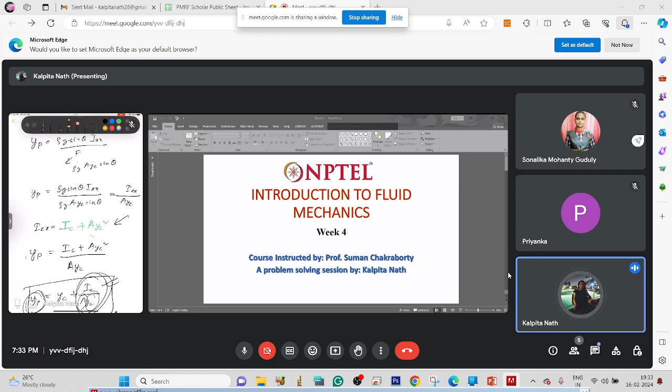Now if we will do the same thing for a curved surface, we won't go for the full derivation, but I'll give you a brief explanation or idea about what is happening. So if this is a curved surface, for any curved surface immersed in a fluid, what we will do is take the projection of that curved surface, that means volumetric projection.

If this is a curved surface, this is not just a simple line, right? This is like this. So it will be the whole volume of that surface, the whole surface into the board or paper or whatever the notepad may be. So this will be like that.

So what we will do is take the whole volume, that means this whole volume that is above that curved surface. We will take the pressure of that whole volume acting on it to determine the pressure that is acted on this curved surface. So let's suppose this is the vertical force, and this is the horizontal force.

This is the force. First we will calculate, or derive rather, the force that is acted by the surface on the fluid. So what will be the force that will be acted by the fluid on the surface? That will just be the opposite of this, equal and opposite.

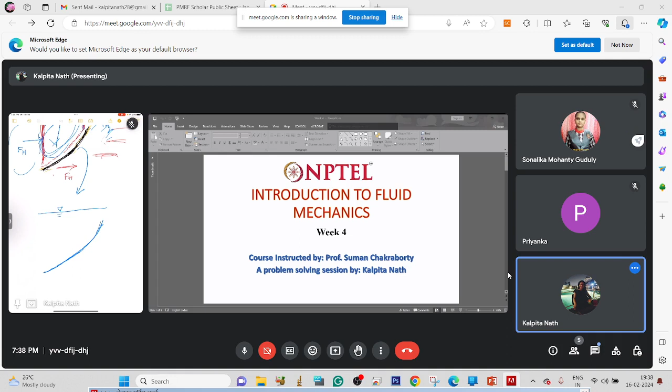Now we are interested in the forces acting on this projected volume. So let's zoom this up. This is the free surface. This is the body. This is the volume that we are taking into consideration.

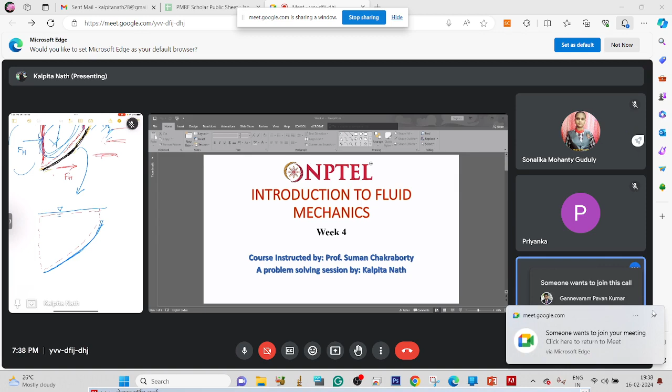Just one second. This is the volume that we are taking into consideration. And this is the weight. This is the vertical force and this is the horizontal force.

So this is because of what? This is because of the components, because of the reaction between the surface and fluid. So these are the final components, right?

So this is FH1, as I already told. For this fluid on the left side of this surface, there will be pressure exerted on this side of the projected volume. So this is FH1, and this is FH2 on the right side, acting on the right side.

AB and CD are plane surfaces. Let's suppose this is CD and this is AB. So AB and CD are plane surfaces. And now, if we find out...

If the fluid is in equilibrium, then the summation of all forces in the x direction will be 0. So in the x direction, what are the forces? First is FH, one force due to the reaction.

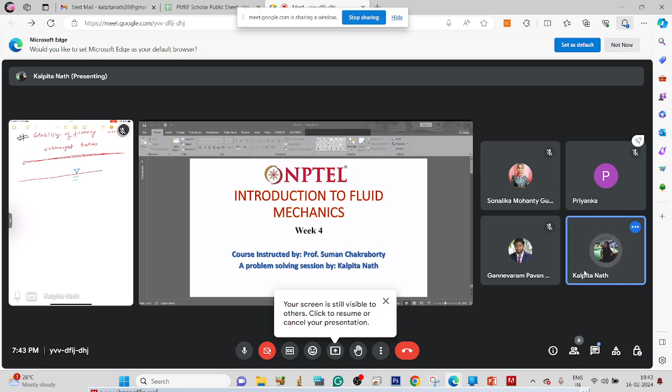So there will be, let's suppose if we take a body into consideration, let's suppose this is the free surface. So this is a body that is completely submerged in this fluid.

This is the center of the body. If this is the center, then let's suppose this is the center of buoyancy, and this is the center of gravity. So center of gravity will denote the weight of the body, and this will give rise to the buoyant force.

Okay, so let's suppose this is OB and this is OG. So there are two cases, one is stable, another is unstable. Can you tell me, in the stable case, whether B is above G or G is above B? Anyone?

B above G, ma'am, in stable case. Yeah, correct. B will be above G for stable equilibrium, and for unstable, vice versa.

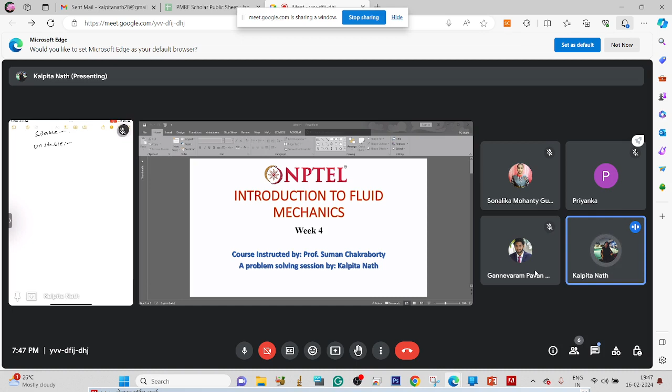So suppose if this body we are just tilting it on the right. Let's suppose now, this is the free surface and this is the body. This is the center of buoyancy and this is the center of gravity.

So for center of buoyancy, the force will be in the upward direction, and for gravity it will be in the downward direction. So what does a couple mean? Here a couple will take place. So what does this couple mean?

When there are two forces, if we draw a perpendicular line - let me use some other color - suppose we are drawing a perpendicular line, this perpendicular line will act as a couple for these two forces, right?

So in this case the couple will be directing in this direction, that is anti-clockwise direction. So we are giving force in the clockwise direction and the couple is acting in the anti-clockwise direction. So the body will come back to its original position after some time because of the stable equilibrium.

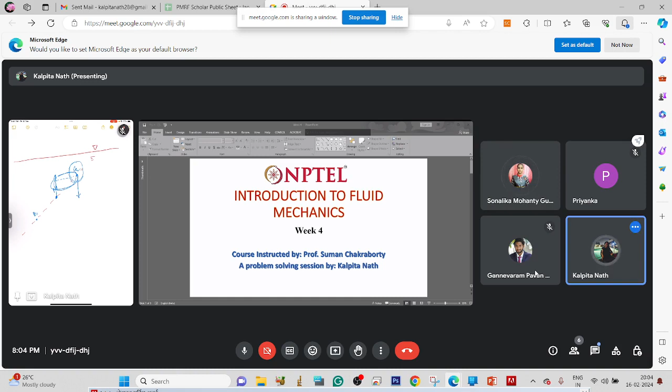So this is in the clockwise direction. Now, we are toppling in theta direction, that means in the clockwise direction, and the body couple is also acting in this direction. So that means it will be displacing more because of the body couple. That means this is in unstable equilibrium, it won't ever come back to the original state. So this is unstable equilibrium.

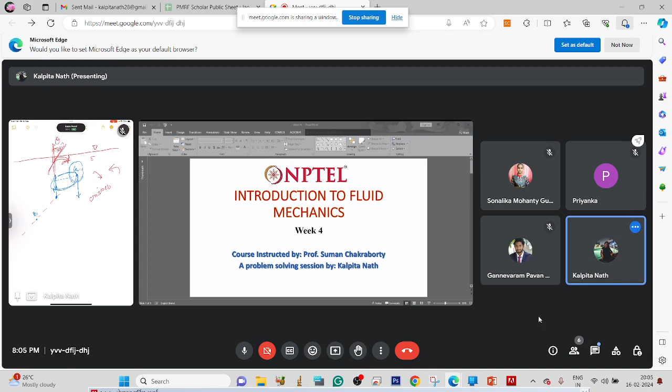Okay, so we are done with the basic discussion of what happened in the previous class, what sir taught and all. I have not gone through the derivation in detail because you have already taken the classes, and if not, you can just go through the classes. I think I've given you enough description so you will get an idea, a visualization of what is happening. Yes, tell me.

Can you again explain the difference between floating and submerged bodies? A submerged body is one that is wholly inside the fluid. A floating body is partially inside, meaning some part of it will be outside the fluid. So in case of a submerged body, what will happen? Even if we topple the body...

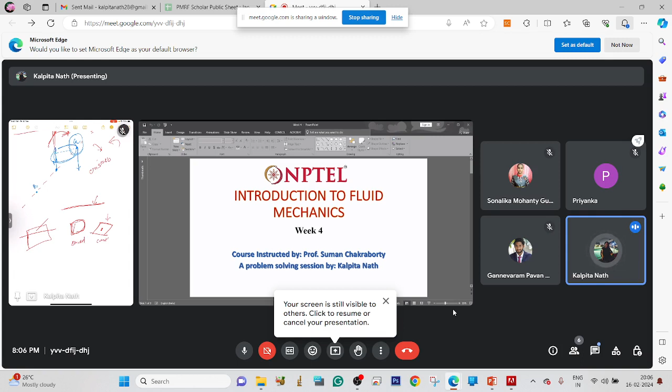As the volume submerged in the fluid remains the same, the buoyant force and the center of buoyancy and the center of gravity will anyhow be on the same point. Whatever it was in case 1, the same will be in case 2 - the center of buoyant force will remain at the same position. But...

In case of a floating body, when we topple it like this - this was the volume inside the fluid in case 1, now this is the volume inside the fluid in case 2. That means the buoyant force acting on the body will change, obviously. Understood?

Yes, ma'am. Okay, so the center of buoyant force will be the same when the body is completely submerged, but in case of a floating body, it will be different - the center will change, as I have shown here.

In this case, the center of buoyant force has shifted from B1 to B1 dash, where the volume - as Priyanka correctly noted - when we topple it, where the volume submerged is more, like if we are toppling on this side, then volume submerged will be more on this side.

But as we are now toppling on the right side, more volume of the body is submerged in the right side direction, so the center of buoyancy will be shifting to the right side. Okay. Yes, ma'am.

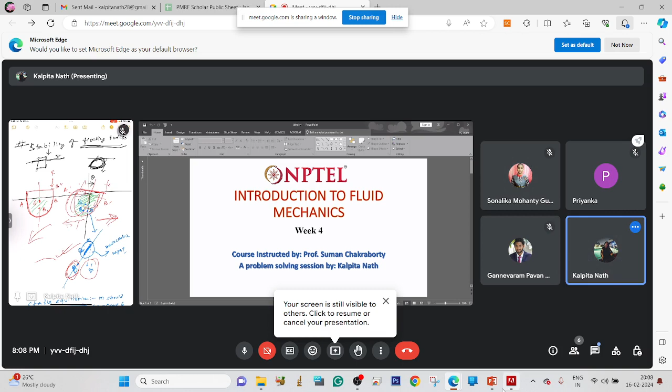So now let us move on to today's questions.

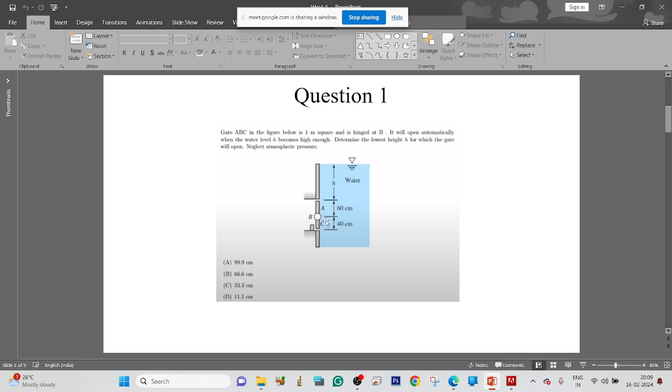This is the first question that will give you a basic understanding of what is happening and what forces are acting, and how to find that out. This is a fluid element, and we can see there is a gate A, B, C that is present here. Let me increase its size.

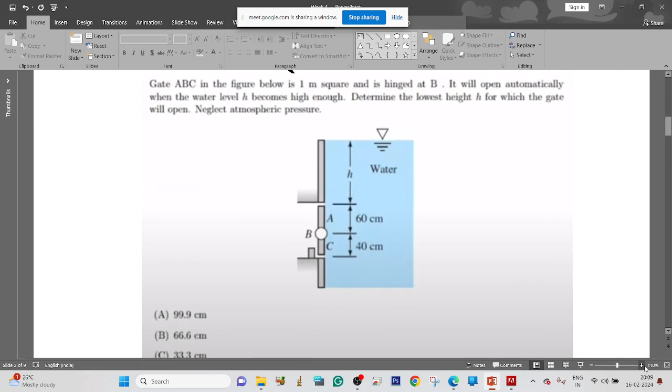Ma'am, the question is not visible. Just one second. Is it visible now, or should I increase the size? No, ma'am, not visible. Just one second. Is it visible now? No, ma'am, only that is visible - what you have discussed. The writing is also not visible. Ma'am, I think she's facing the same issue as I did in the first class, that you told me to pin the screen.

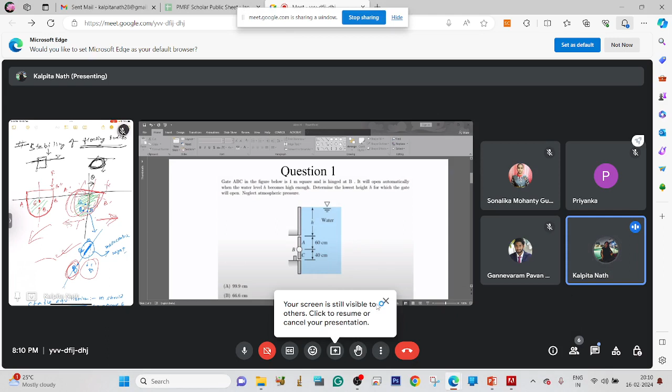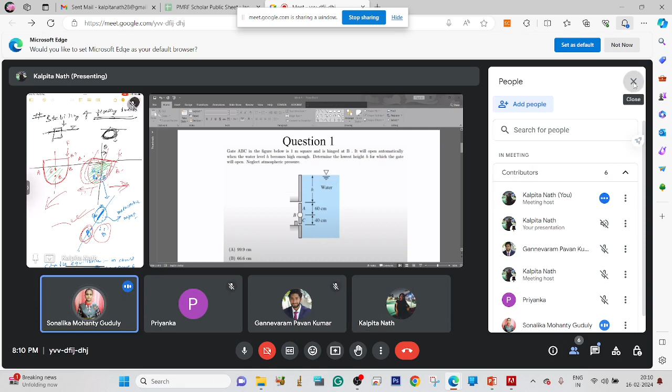Oh okay, yes, can you see the screen that I'm sharing? Not the notepad, the other screen. No, ma'am, only the notepad is visible. Check the participants, can you open and show everyone? Yes ma'am, so there you can see me presenting - there will be one presentation, can you see that? There will be three dots, five icons - one icon for presentation, you can pin that, there will be three dots on the right side, just pin that. Yes ma'am, okay, both are pinned now, you can see the notepad as well as the question. Yes ma'am, is it fine? Okay, is it visible now? Yes ma'am, you didn't type the question, right? So it may be a bit hazy but I think it is definitely understandable.

So what is happening is there is a gate valve, and there is a water height present - the free surface is denoted. As there is some height of water above that valve, when that pressure is applied on this valve, it will try to open the valve and exit from this place, A, B, C. So can you tell me where the probability of escaping is more? From which portion will the fluid escape in the gate? Anyone?

Did you understand what is the top gate question? Top gate means there is some restriction in the bottom gate, so our main aim will be to focus on the top part, that is AB, and we'll try to bring all the forces onto that part itself.

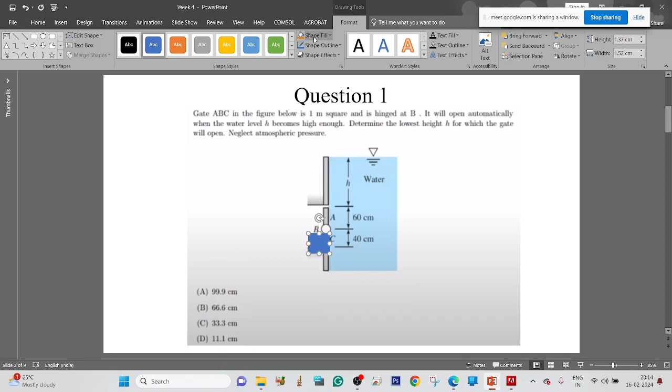Okay. Just one second, this is lagging. Okay.

Okay, so can you see this restriction? This one? Yes ma'am, I have to show you like that only. So you can see that restriction, right? This won't allow that valve to open on the BC direction, so that's why we have to focus on AB to open the valve and let the water escape.

What does it say? To determine the lowest height h for which the gate will open. This h can be denoted here, right? This is h, so we need to find this lowest height h. We will find it for this whole AB portion as it is, and for any point below AB, for any height present, we can say that the gate will open.

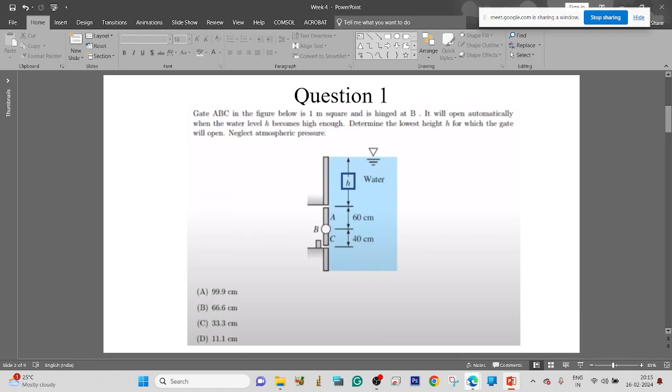So can you solve this for me? Have you understood what this question wants to say? Oh ma'am, to determine the height. Yeah, we have to determine the height h for which this gate will open. So the gate will open from A to B only, so we have to take the total height from the free surface up to this point B.

So any height that will be up to point B will help in opening the gate. Below that, because of the restriction, it can't open. I think you have understood, so I'll give you 5 minutes to solve this, then we'll proceed with the solution. Solve this, I'll come back in 2 minutes.

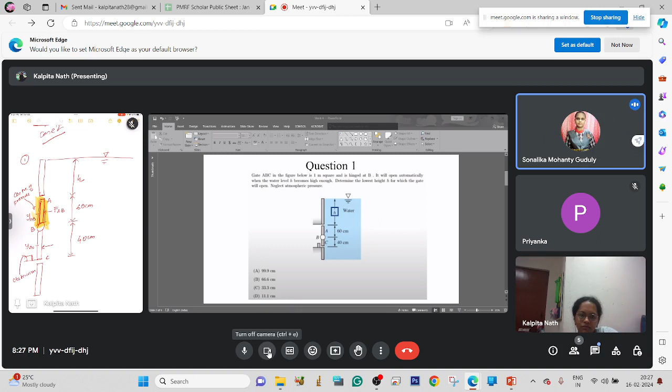Okay, so ma'am, I'm getting around 41 centimeters. No, it should be 33, I believe. It will be about 33, right? It will be in between, we have to calculate, it should be below 60 about. So it should come around 33.3, as far as my calculation goes.

Okay, let me solve it for you. Let me give Sonalika first a brief idea of what is happening. So this is the gate, right? But we can't open this gate on this side. Why? Because of this restriction. So we need to focus on this upper portion, that means from A to B. So we will focus the force on FAB in this direction.

Now we will apply the concept of center of pressure. It is the point along which the resultant force of pressure due to the fluid column acts in a submerged body. So we do not want the center of pressure anywhere near YBC, rather we want it in this AB portion, right? So this is desirable as we want the net force AB in counterclockwise direction, that means in this direction, so that this valve opens.

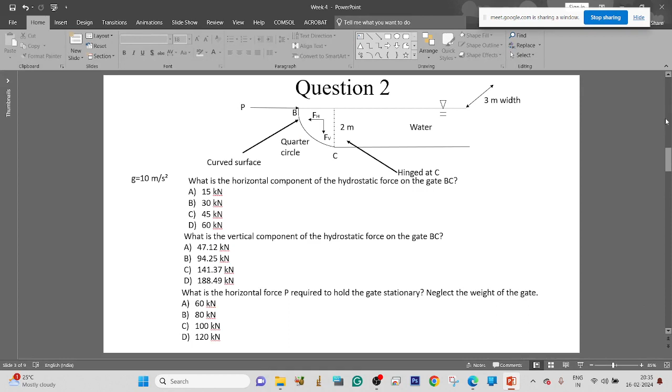Ma'am, how do we identify from the question that the concept of center of pressure is used here? Let me show you. In this kind of question, where a body is submerged, or some pressure is applied from another point, like in this case some valve is there and pressure is applied and the fluid is static - when the fluid is static, we can apply this center of pressure concept. That will help us solve directly without going into much derivation.

Yes ma'am. Okay, so let's solve this question now. What is told here, that we went through that curved surface submerged in the fluid. This BC is the quarter circle, that is also a curved surface, into the paper, submerged in this fluid. So tell me, what is the horizontal component of the hydrostatic force that will be applied on this gate BC? Ma'am, FH and...

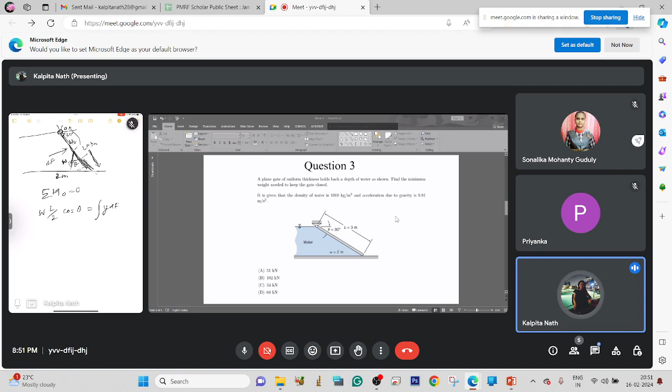So this will be the integration of y df. This represents the interaction between the fluid and the gate. So this df is what? We already know dF is p dA.

P is equal to rho g h, that means rho g y sine theta. We have already derived this. So df will be, if we put it in the main equation, y rho g y sine theta d.

So this is the equation we will be solving, integrated from 0 to the whole length of the gate. If we solve this, we will get the value of W, the weight of the gate required to keep it in equilibrium.

So can you solve this? What will be the answer? Ma'am, can you please explain again? There is a screen problem.

Let me use another color. If this is the point about which we need to calculate the moment, and this is the whole gate whose weight we are considering, then if we calculate the moment about this point O, it should be zero at equilibrium.

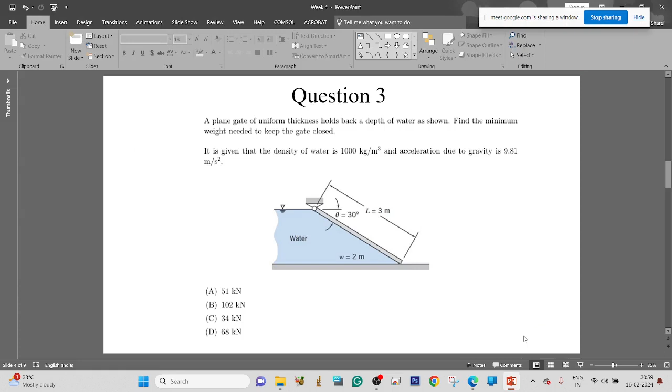Okay, so let us proceed to the next question. Is it visible?

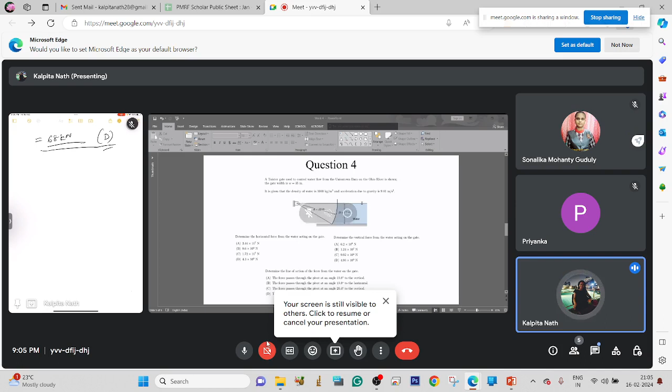The horizontal force, what will be the horizontal force? Sonalika? Priyanka?

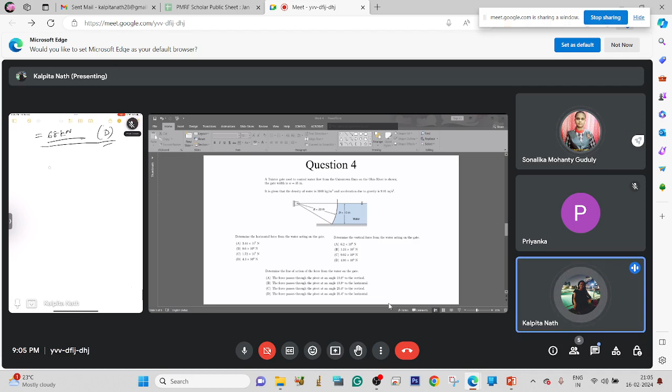Theta will be, see, I'll show you this. This is the gate, this is 10 meter. And see, this is theta, right? This is theta. Oh, my handwriting is so bad, let me draw it again. See, this is some theta, and this is the gate actually, and this vertical distance is 10 meter.

And if this vertical distance is 10 meter, and this r is 20 meter, right? So if we consider this triangle, let's suppose this is 10 meter and this is 20 meter, then it will be sine theta. If this is theta, sine theta will be this upon this, that is 10 upon 20. So theta will be sine inverse 0.5, that means 30 degree.

Use this as theta. Yes ma'am, Priyanka, have you solved? Ma'am, 1.72 into 10 raised to 7 Newton. 1.7, yeah, correct.

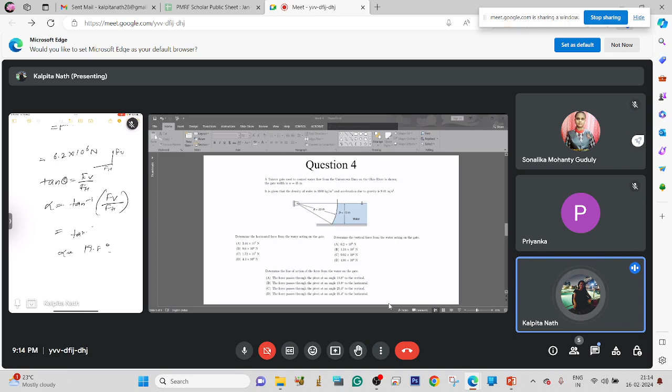So let me show you what this alpha is, to get an idea of what is happening. This is the arc and this is the free surface. So what is happening, if this is theta, right? If we magnify it, this is the direction where FH is acting, this is where FV is acting, so this is the resultant force, and this is alpha.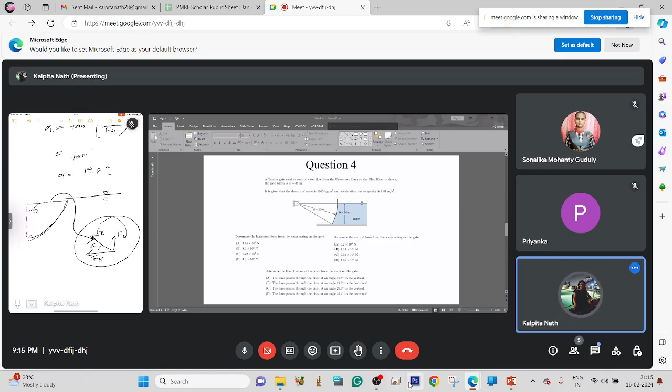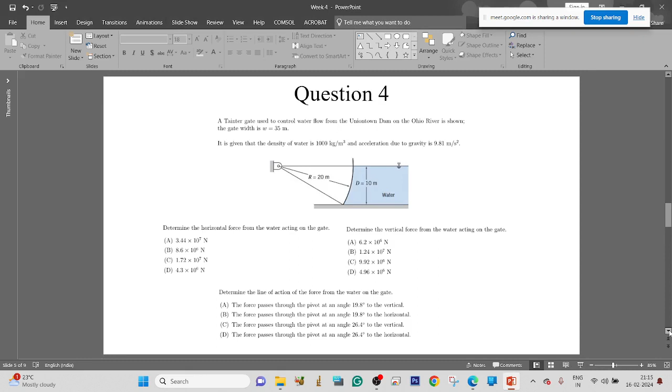Okay, so can anyone tell me what will be the answer to this question? If B denotes the distance of center of buoyancy from the free surface, and G denotes the distance of center of gravity from the free surface, then which among the following conditions ensures stable equilibrium? Is center of buoyancy less than gravity, or buoyancy greater than gravity, or equal?

Ma'am, A. Yes, okay. For the second case, for unstable equilibrium, it will be just the opposite. B, ma'am. Yeah, and for the neutral equilibrium, which option will it be? Option C, right? Okay, so you have got a clear idea of what is happening.